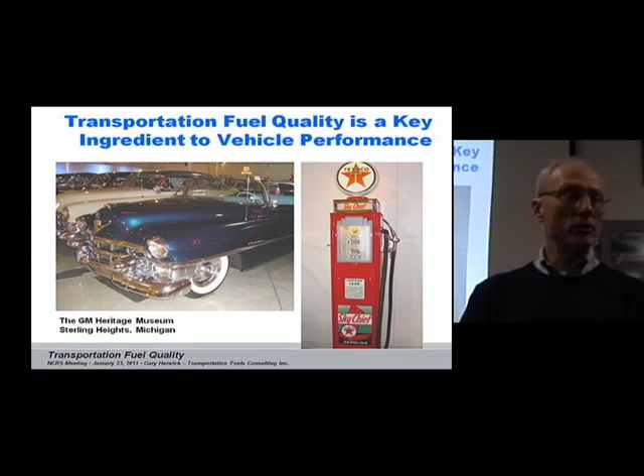What I'm going to try to do is to talk about transportation fuel quality. I have a consulting business since I left GM in 2005 that's called Transportation Fuels Consulting. I call myself an expert in vehicle emissions and transportation fuel quality and alternative fuels. Obviously, fuels and vehicles go together, and you have to have good fuel quality if you want good performance and drivability and durability and all the other things.

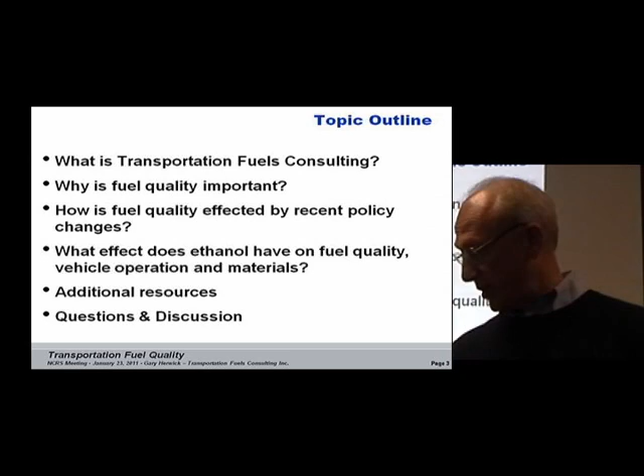This is the outline. First, I'll tell you a little bit about me and who I am, where I come from. Why is fuel quality important? That's obvious. How is fuel quality affected by recent policy decisions? What effect does ethanol have on the quality of fuels and vehicle operation and materials, and some additional resources that you might find useful?

35 years with GM. I was at Powertrain and ended up at the Public Policy Center at Renaissance Center. I worked with the Coordinating Research Council, where I was on the board of directors. I was co-chair of the emissions committee. I've written a few technical policy papers in the areas of emissions and fuel quality. I was involved in various fuel quality initiatives. There's a document called the Worldwide Fuel Charter and the GM Well-to-Wheel study.

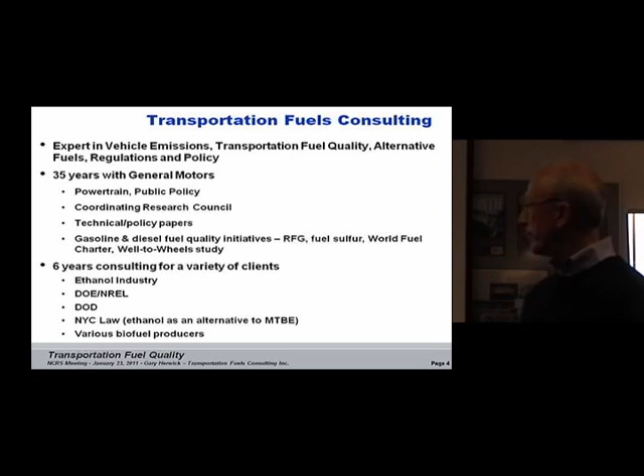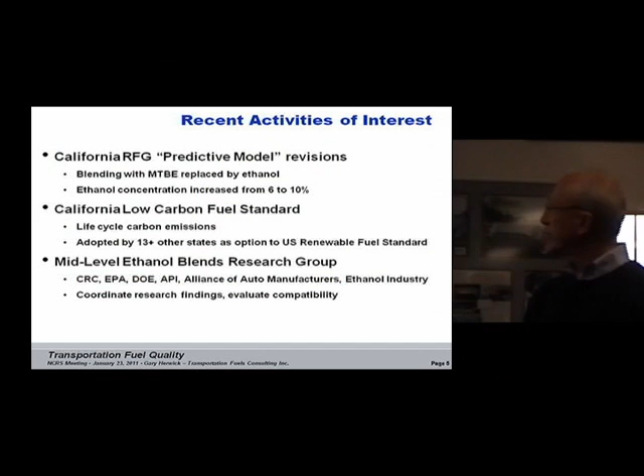I spent 6 years consulting for a variety of clients. Full disclosure, I'm doing some work for the ethanol industry now and have for a couple of years. But I've also worked for the U.S. Department of Energy, for the National Renewable Energy Lab, for the Department of Defense. I'm an expert witness. I worked for NYC Law, and I've taken various biofuel producers through the EPA process to be registered to sell their product. Worked on the California Reformulated Gasoline Predictive Model revisions, the California Low Carbon Fuel Standard, Mid-Level Ethanol Blends Research Group.

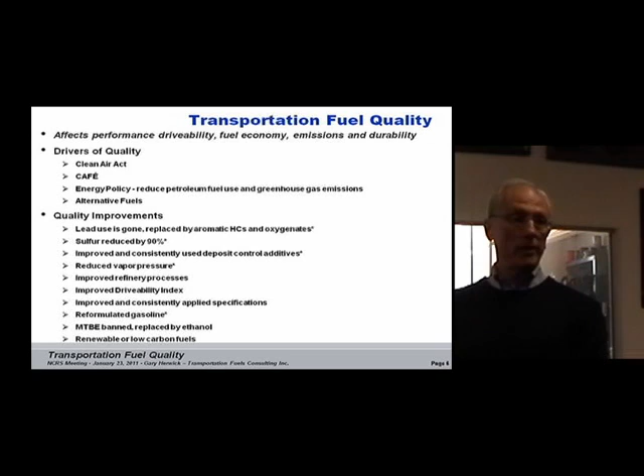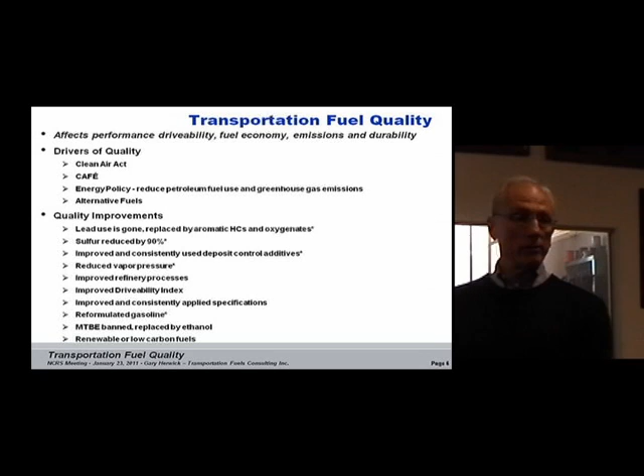Transportation fuel quality affects pretty much everything: performance, drivability, durability, emissions. Some of the drivers of quality over the past 40 years are the Clean Air Act, largely driven by emissions. CAFE, corporate average fuel economy increases, drive consistent fuel quality specifications. Energy policy, in my words, if you boil it down, is focused at the reduction in petroleum fuel use and the reduction in greenhouse gas emissions. And just in general, the use of alternative fuels for its own reason. People seem to like alternative fuels.

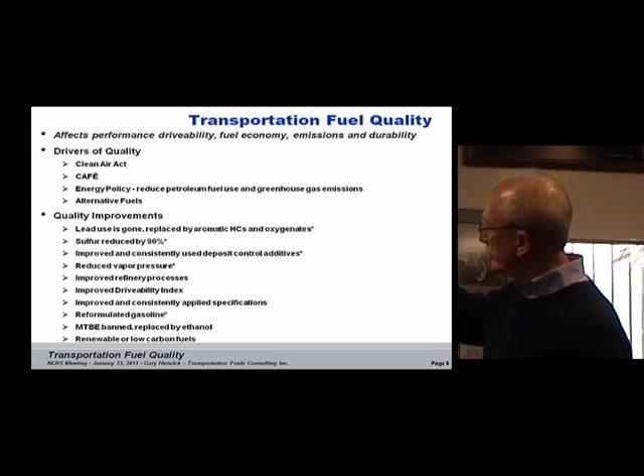So what's happened over the last 40 years in terms of fuel quality improvements? There's a whole list of them. Obviously, lead is gone, and it's been replaced by aromatic hydrocarbons and oxygenates in some cases. The ones with the little asterisk afterwards are generally emissions-driven things in my mind. Sulfur was reduced by 90%. We had 300 parts per million sulfur in the early 90s. We're now down to 30 parts per million. We had improved deposit control additives, greatly improved with fuel-injected engines.

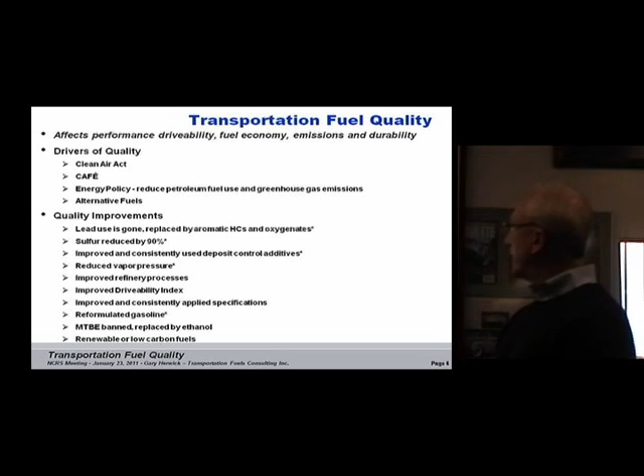It's worked to get uniform specifications in fuels, so that we've got a uniform fuel that we can pretty well rely upon, not just in one state, but in most of the states in the United States. Reduced vapor pressure. Most summertime fuels are no higher than 7 or 8 psi. Improved refinery processes, drivability index, which is a combination of the distillation properties in gasoline. Reformulated gasoline, obviously the MTBE ban, and now we're focused on renewable fuels and how we get renewable properties in fuel.

The renewable fuel standard will drive 36 billion gallons of renewable fuel; corn-derived ethanol will increase to 15 billion gallons in 2015 and later. To put that in perspective, we use about 140, 150 billion gallons of gasoline a year in the United States. So 15 billion gallons is roughly 10%. At any rate, we're supposed to make this up with cellulose-derived biofuels, which is kind of a dream. Will it ever happen? I'm not sure. There are a number of companies I've taken through EPA registration that are going to try to make cellulose-derived fuels. They have processes in place. They're very expensive now. One of the bigger questions is how do you integrate it into the existing refining and distribution infrastructure? That's a huge deal.

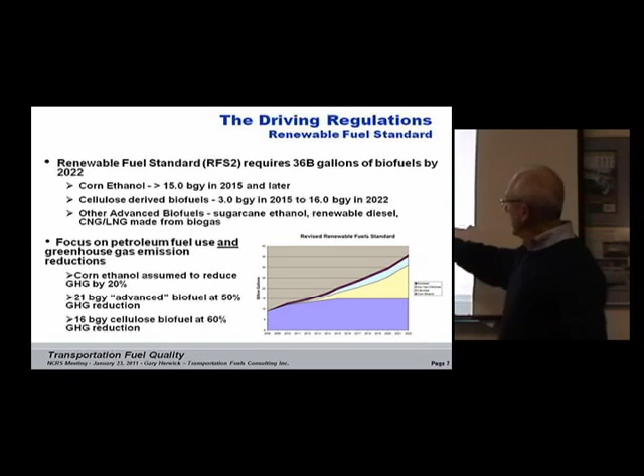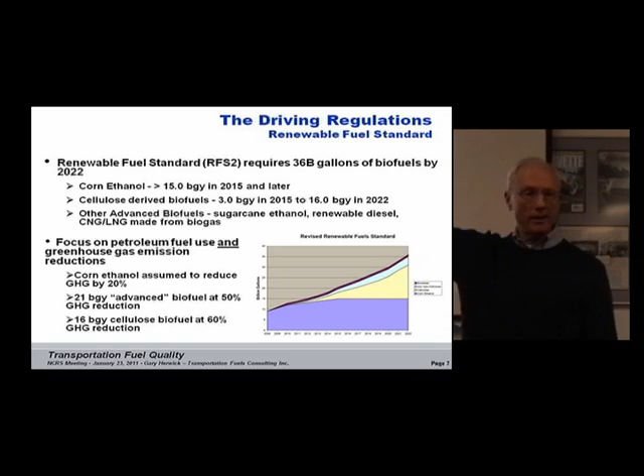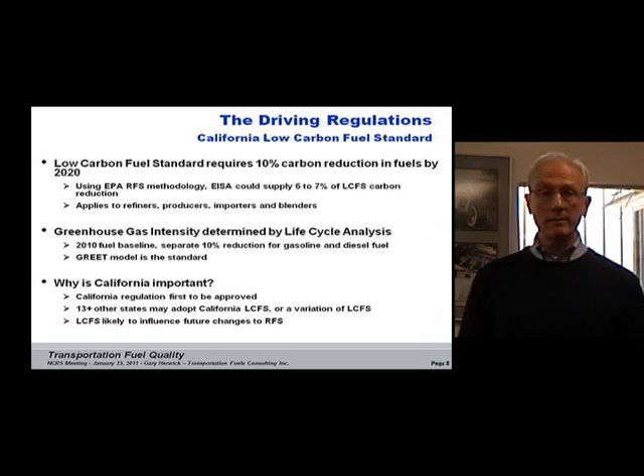There's biodiesel and other advanced biofuels, but the main thing about the Renewable Fuel Standard is that it was premised on two things: to reduce greenhouse gas emissions, carbon, but also reduce petroleum fuel use. The California Low Carbon Fuel Standard is based entirely on carbon reduction. All they're interested in is greenhouse gas emissions. It by contrast calls for a 10% reduction in carbon from the fuel content. The refiners are the regulated parties. They have to figure out how they're going to get 10% reduced carbon. That's a difficult thing to do.

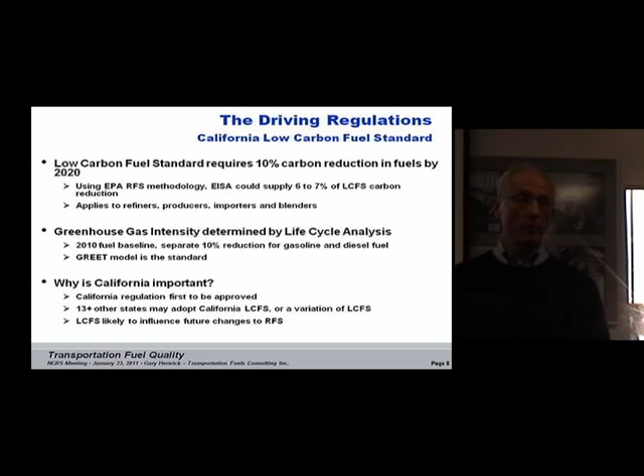The Renewable Fuel Standard, which will get you to 36 billion gallons, would only get you to 6 or 7% of the Low Carbon Fuel Standard. So the California specification will require much more use of renewable fuel. And keep in mind that it's not just California, but 13, 15 other states.

Ethanol is currently blended, as we said, in 70 to 80% of gasoline at the 10% level, which is 3.5% oxygen, just for your information. EPA approved a waiver, which we already talked about, for 15% for 2001 and later model years. Mid-level blends are coming as well, and the ethanol industry is going to try to market those. They'll be driven to some extent by the Renewable Fuel Standard, but that's for flexible fuel vehicles only.

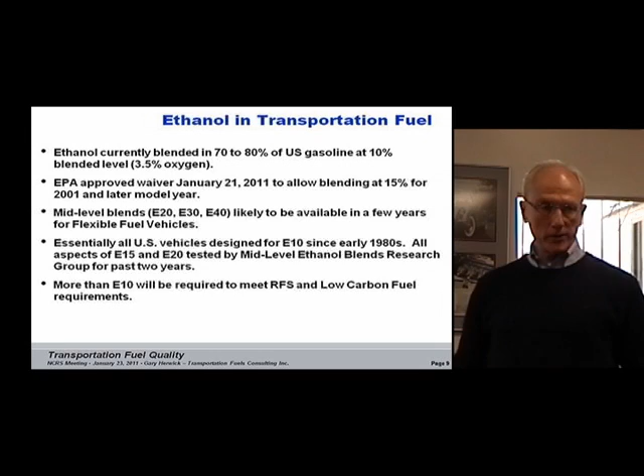Essentially, all U.S. vehicles have been designed for E10 since the early 1980s, so there shouldn't be an issue. It isn't a difficult thing to design. The autos, the oils, and so forth have been testing all aspects of E15 and E20 for a couple of years now, and have identified any issues, and basically there aren't any showstoppers.

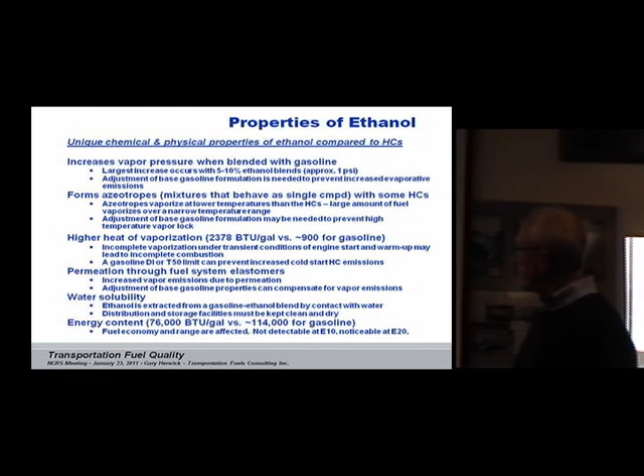Now we're going to get into the engineering stuff. These are the unique chemical and physical properties of ethanol that are different than gasoline. It increases vapor pressure when it's blended with gasoline. If you blend 10% ethanol, you're going to get a bump of 1 psi in vapor pressure. It forms azeotropes with some hydrocarbons. Again, you need to adjust the baseline gasoline properties in order to have something that won't vapor lock.

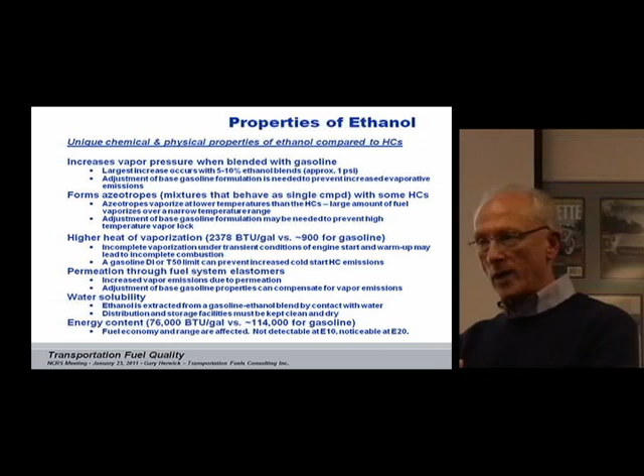There's a higher heat of vaporization, which is an important thing. It's actually a higher vapor pressure, but it doesn't vaporize as readily. You get more permeation through the elastomer components, and water solubility. So it's just a matter of distribution facilities, terminals, and so forth having good housekeeping practices; they have to watch the water content. The energy content we already talked about, 76,000 BTUs a gallon for ethanol, 114,000 BTUs for gasoline.

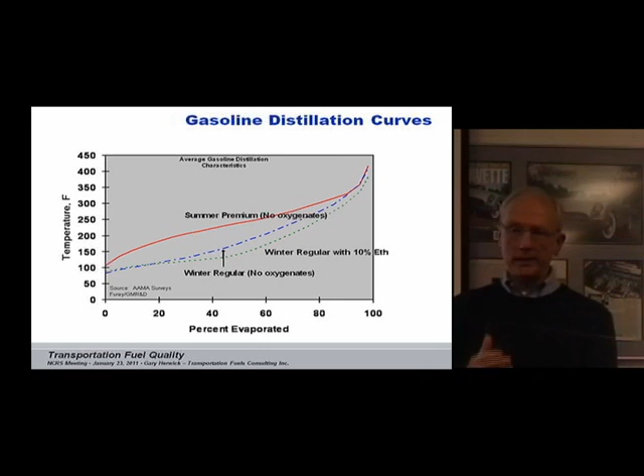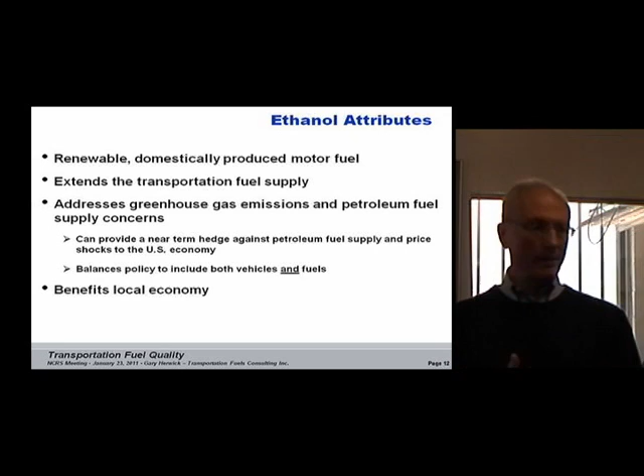This is what it does to a distillation curve. If you put ethanol in, it's a single component, and it's going to change the look of that distillation curve. Ethanol attributes. Now let's talk about some positive things. It's a good motor fuel. It's a renewable product. In other words, we're not going to run out of it. We can produce as much of it as we want. It's domestically produced. We don't have to import it. It extends the transportation fuel supply.

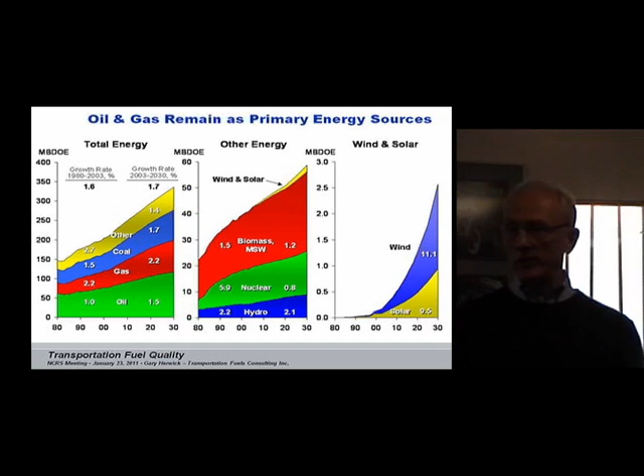And this is a chart. ExxonMobil does what they call an energy trends report, and they're saying that up through the year 2030, basically we're going to have a 40% increase in energy demand. We're going to need every source of transportation fuel that we can get, and we're going to need to develop some alternative sources as well just to meet global demand. We need a hedge against petroleum fuel supply and price shocks.

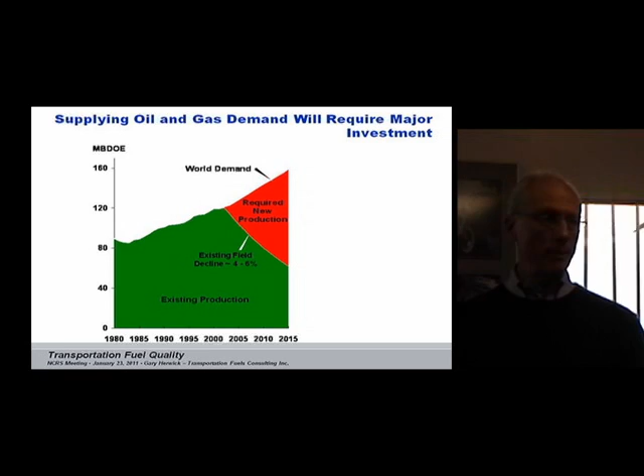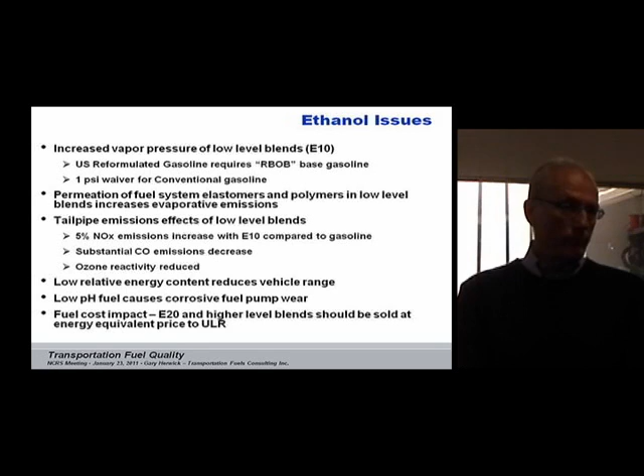Ethanol issues, plenty of those. Increased vapor pressure, we've been talking about that. Permeation in fuel system elastomers, tailpipe emissions effects of ethanol blends; it increases NOx emissions. A low relative energy content reduces vehicle range. Low pH fuel causes corrosive fuel pump wear. E20 and higher is definitely going to have to be sold on an energy equivalent basis.

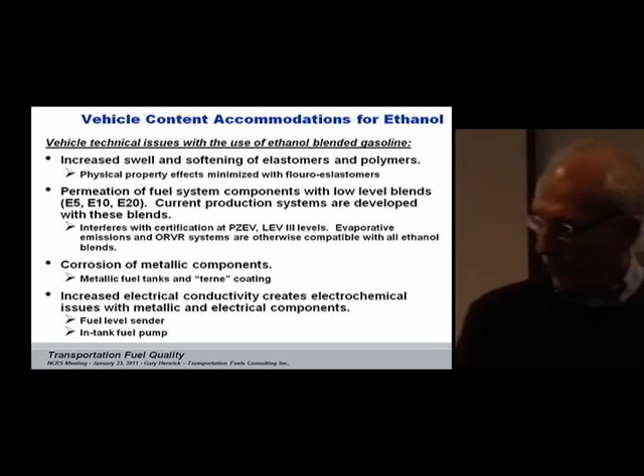Vehicle content accommodations, this came from GM. Increased swell and softening of elastomers and polymers. That's what ethanol does. If you take an old rubber hose and soak it in ethanol, it's going to get soft. But if you use fluoroelastomers, it's fine. So with your old cars, if you upgrade the elastomers and polymers, you shouldn't have any trouble at all.

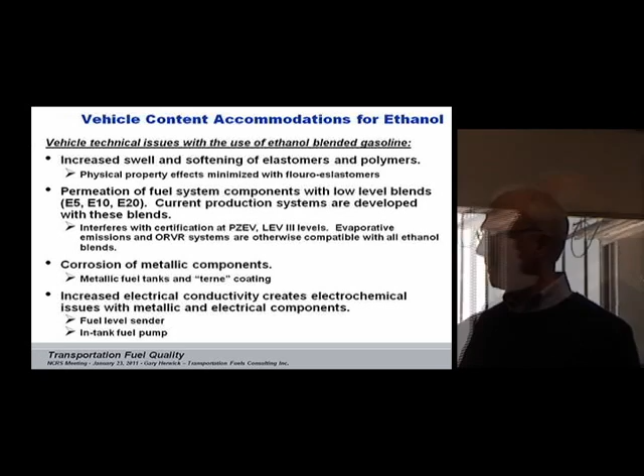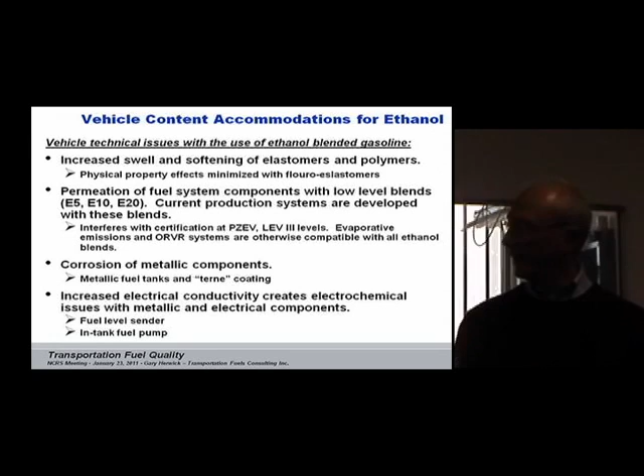Corrosion of metallic components. If you've got an old metal fuel tank with a terne coating on it, it'll take the terne coat right off and send it right up through the fuel system. It causes electrochemical issues with the fuel level sender and in-tank fuel pumps.

Kettering University did a study here recently, very, very timely. They released it October 2010. They were contracted by Hagerty Insurance, and said, you know, look at old cars. So what they did was a component test of carburetors and fuel pumps. They did what they called a static test and a dynamic test, where they had a '69 Chevy Bel Air,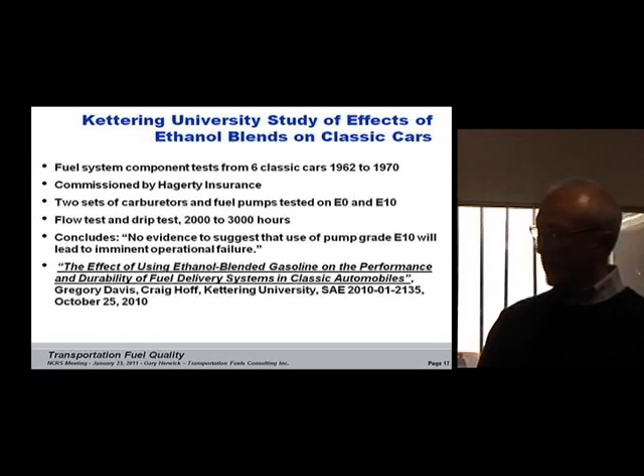and they got carburetors and fuel pumps, a combination of used and new parts, and they subjected them to what they called a dynamic test, which was a flow test essentially of these parts, and then they had a static test, which was a drip test, for 2,000 to 3,000 hours, so it's a respectable test, I think. They published an SAE paper. They concluded there's no evidence to suggest that the use of pump grade E10 will lead to imminent operational failures.

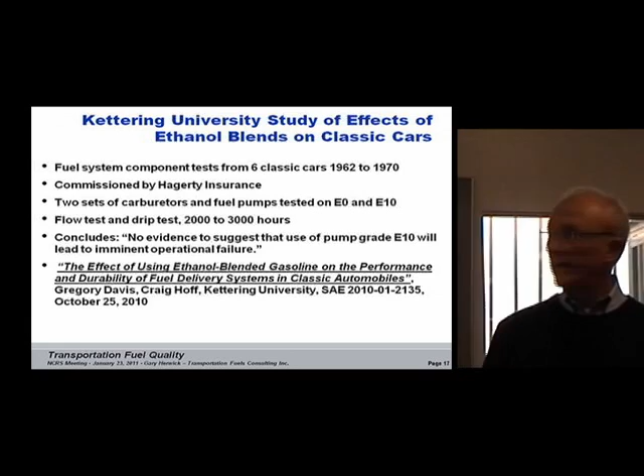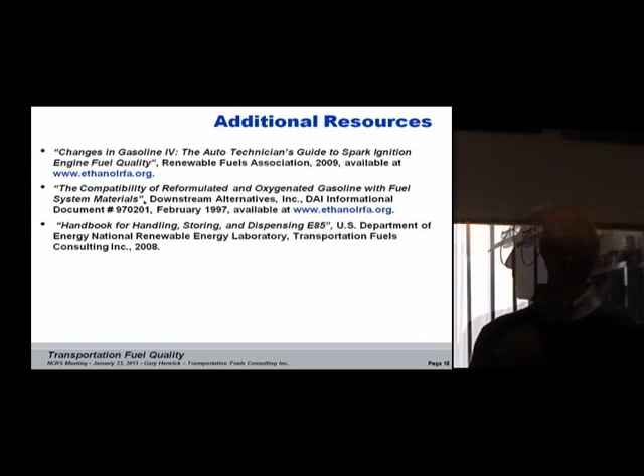Additional resources, I got some additional resources for you if you're interested. There's my friend Bob Reynolds who wrote a couple of things here. Changes in Gasoline 4. It's written for the auto mechanic. It's a pretty good primer on gasoline properties and their effects, and he's a knowledgeable guy. It's on the Renewable Fuels Association website, ethanolrfa.org. And there's Compatibility of Reformulated and Oxygenated Gasoline with Fuel System Materials, Downstream Alternatives. Again, it's my friend Bob Reynolds who wrote that.

And this last one here, Handbook for Handling, Storing, and Dispensing E85. That's something I wrote for DOE. I recommend it to you not because you're going to have any concern about E85, but because it goes through a lot of the stuff that I just talked about.